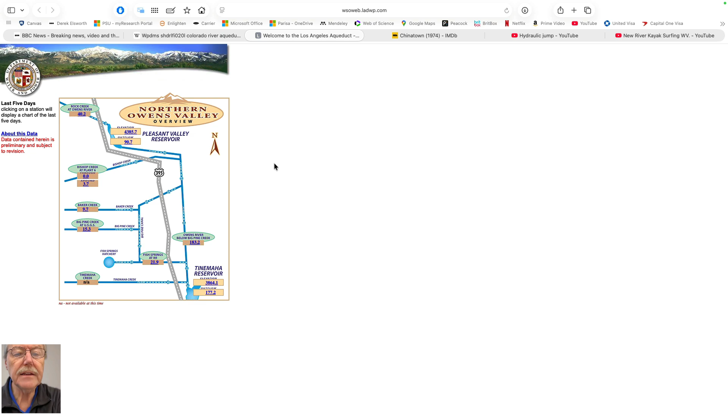I guess San Francisco probably gets its water from Yosemite, the Tuolumne and the Yosemite area of the Sierras. But certainly LA gets it from the Colorado River, and if you fly into San Francisco, you fly over portions of the aqueduct just before the coastal ranges.

The big controversy is where that water comes from and who has rights to it. Colorado wants it more now because they are dry and snowpacks are down. Actually, Chinatown, the movie with Jack Nicholson, before your time, talks about the settling of the Owens Valley, which is what brings the water into LA after it comes across the mountains. It's a story of intrigue set in LA.

So again, the things we talk about in this class in terms of open channel flows are perhaps less relevant, but we will talk about it today. Maybe tomorrow, on Friday, we'll talk about a big picture summary of where we've come and how it fits into your different disciplines, in large part.

We made the point last time when we were talking about surfing in West Virginia that the one thing that's different about open channel flows is that you have an extra degree of freedom: the water chooses to flow either deep and slowly or shallowly and fast. Understanding how that transition can occur is part of our job maybe today, but not part of our job on Monday, when we just talked about uniform flows, where the upstream level and downstream levels are the same.

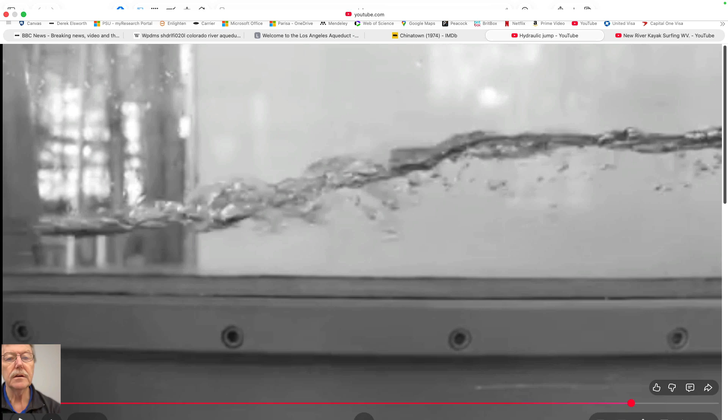It's actually kind of a fun topic, open channel flows, because you have the vagaries of this ability to flow in these two configurations.

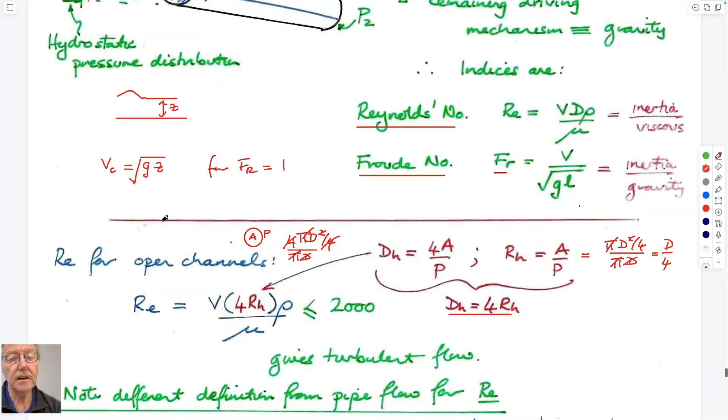Let's go back to what we started talking about last time, just to remind ourselves. The big picture was that pipe flows, external flows, and open channel flows follow the same kinds of rules. They all represent some kind of energy loss in the system by friction. In pipes, that's friction along the wall of the pipe, which varies from laminar to turbulent flow. On objects, such as a falling sphere or a free-fall parachutist, it's flow past that body which we're interested in, and we're interested in the force that's applied to it.

Essentially, if you're falling through space, it's the force of air pressure on your chest as you fall at 200 miles an hour at terminal velocity through the air, which is a pressure on your chest, a force that's applied to the sphere, either as drag or lift. That also follows from laminar behavior and turbulent behavior.

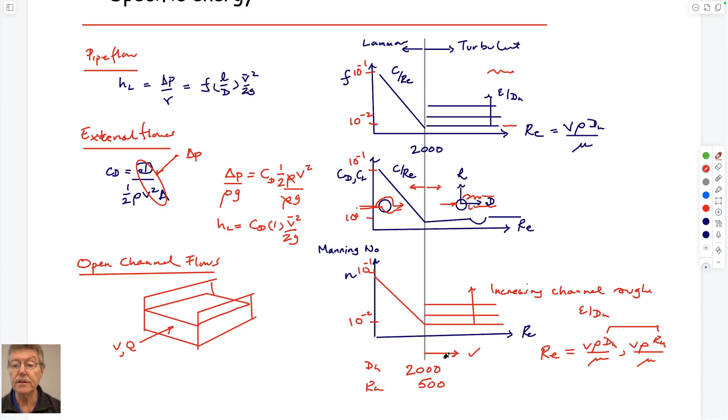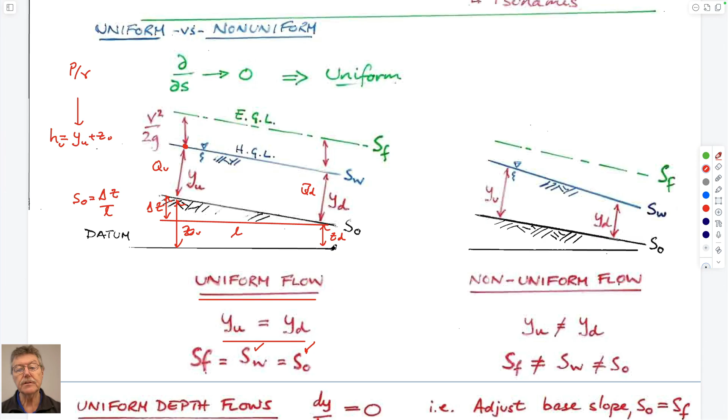When we talk about open channel flows, we made the point that these flows are so wide that the hydraulic radius is so large that Reynolds numbers are typically very large as well. So we only have to deal with the turbulent regime. That was the case we were making last time. We played around with some equations and came up with a formula, the Chezy formula, for the case where the upstream and downstream depths are exactly the same. That formula was this.

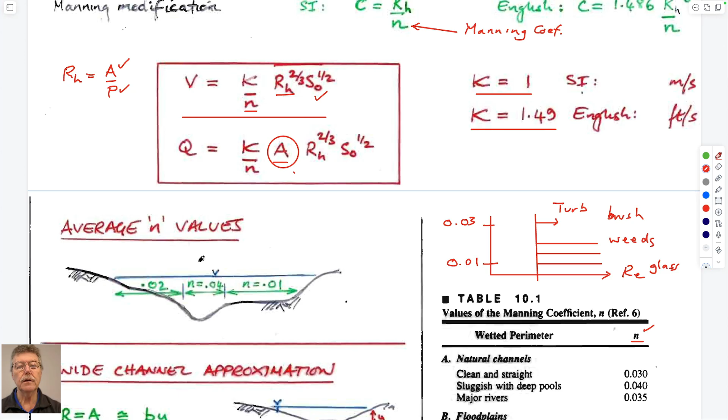This can always be used to calculate a velocity. If you multiply the average velocity within a channel by the cross-sectional area of that channel, it gives you a volumetric flow rate, which would be how water is supplied to San Francisco along the California aqueduct, if you knew these parameters.

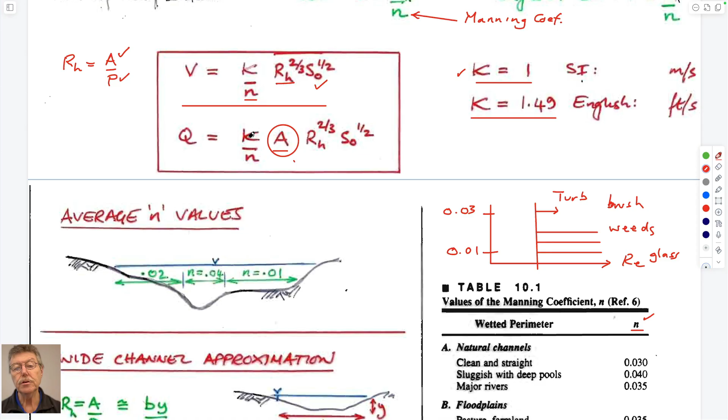We noted that they had dimensions. They were not non-dimensional - the dimensions on the left-hand side don't match up with those on the right-hand side, so we have to be careful of our units. If we're working in SI units, we have a coefficient of 1, and if you're in English units, it's 1.49. You can basically plug and chug with these as long as you know what these components are. We made the case that we're always working in the turbulent regime.

The Manning's coefficient is large if there's a big drag. So if you have brush within a channel, making a drag on the water at the edges, then that Manning's coefficient is large. And if it's a glass-lined channel or a smooth concrete-lined channel, then it's relatively small. So we can make those calculations.

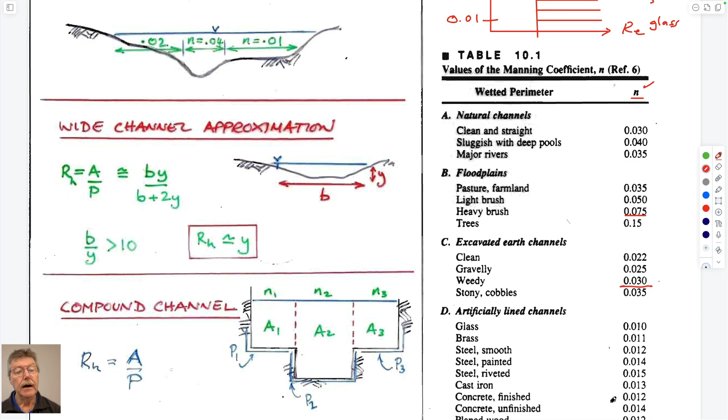These are just some notes on how you might apply it. If the channel is very wide and very shallow, the hydraulic radius is approximately equal to the depth of flow, just because in calculating the area and perimeter ratio, as it goes to infinite width, that will asymptote to just the depth. If we have channels with different materials on different portions, you can subdivide the channel to use different magnitudes of the Manning's number and sum those components.

So we talked about - if you remember back this far, just a drawing to remind you - we talked about pipe networks. If you're flowing between an upstream and a downstream tank with pipes, we said that the sum of the volumetric flow rates equals the total flow rate.

So that would be equally the case here. If you sum the flow rate in this section plus the flow rate into the page in this section plus the flow rate in this section, you have the cumulative amount, which makes sense.

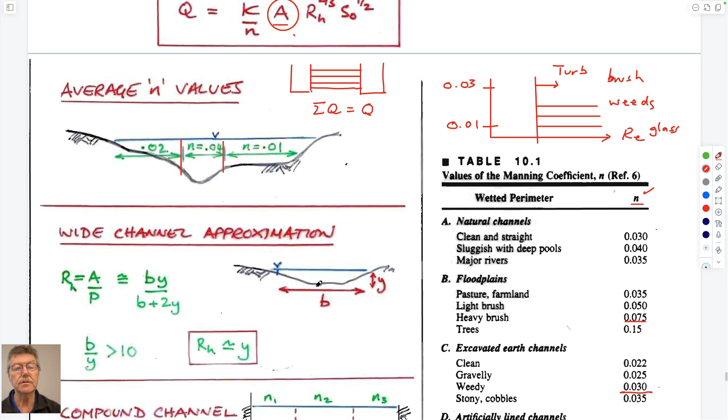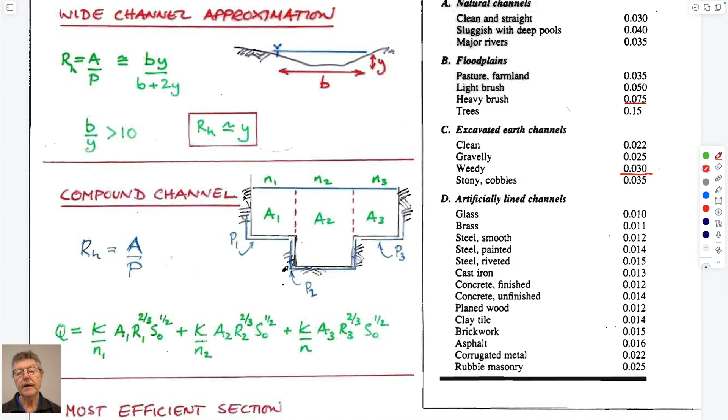If you have a compound channel, which is what this is, with different portions - even if they're the same Manning's numbers on the perimeters - when you sum them, you have to be careful in defining this hydraulic radius, which you need to use in Manning's equation.

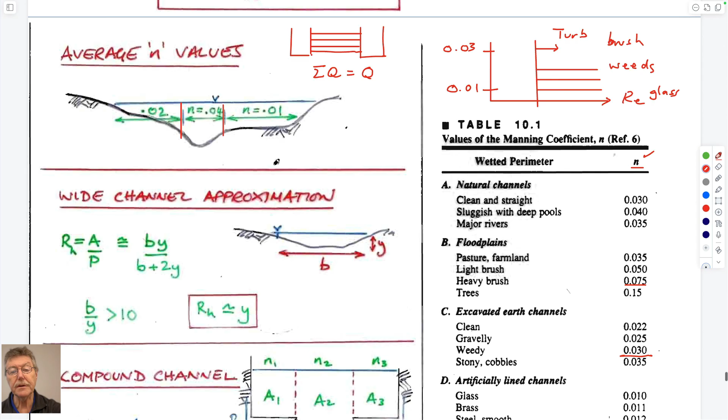I don't mean to give you whiplash. We need to use a hydraulic radius in these, and also the area for the volumetric flow rate. You need to be careful to rationalize the fact that the hydraulic radius is the incremental cross-sectional area divided by the perimeter. So for this channel here, the perimeter would be P1. It wouldn't include this as well.

The reason for that is that the water here is traveling at this velocity into the page. It's also traveling right next door at the same velocity, so there's no net drag between those two compartments. So the perimeter for this cell would be P1, and the area would be A1. So to get the flow rate, it would be A1 times the hydraulic radius, using just this perimeter P1.

Likewise, for this one, the perimeter would be this, and the area would be this. It wouldn't include these two other steps here, for the same reasons. And this is the slope of the basal bed, just as a gradient - drop in height over length.

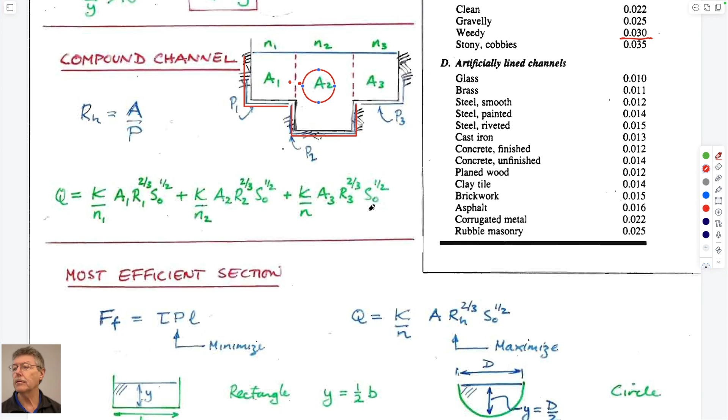So a big kayak river is 100 feet per mile - that's 100 feet in 5,000 feet, so that's about 2% for a very turbulent river, like the ones we looked at, perhaps. And that probably wouldn't be uniform flow. So these values of gradient are typically on the order of a percent or so, 1 in 100.

We can also figure out what the most efficient sections would be, where the drag on the exterior would be minimum for a given section. It turns out that if you look at a rectangular section, the most efficient section is where the depth equals half the width of the channel. For a triangle, it's a right-angled triangle.

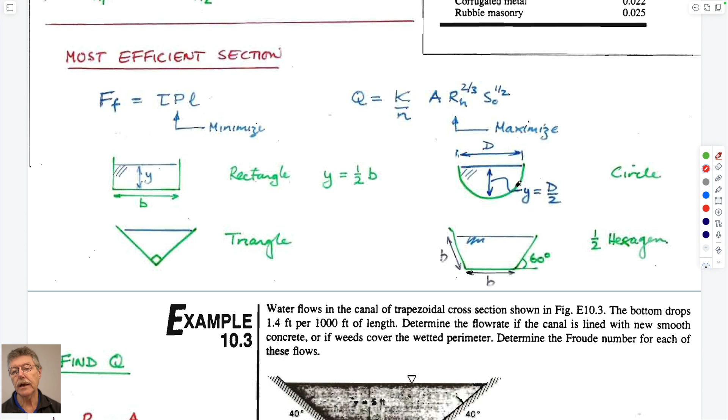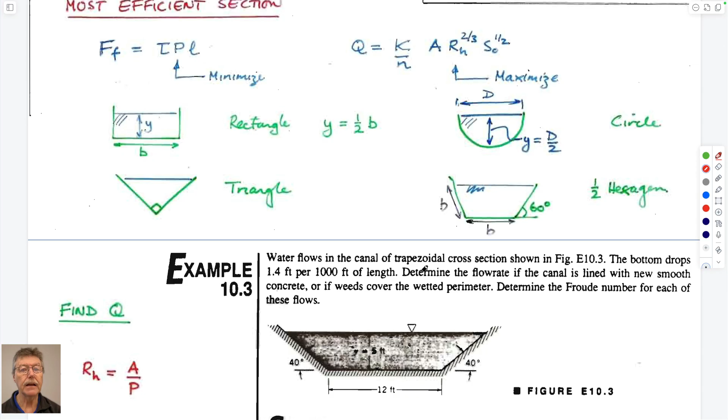For an arc-shaped channel, it's a full half circle that gives the best efficiency. And for a hexagonal channel, it'd be at 60-degree angles. So that's the Chezy formula. The midterm test, the final one, the flow question, this might be a good thing to look at.

Of what we'll talk about now, we'll talk about some other things which are more complex today, but the essence of the midterm final is related to uniform flows. So a quick example here is just to look at a channel which has a section given by this, just to show you what's going on.

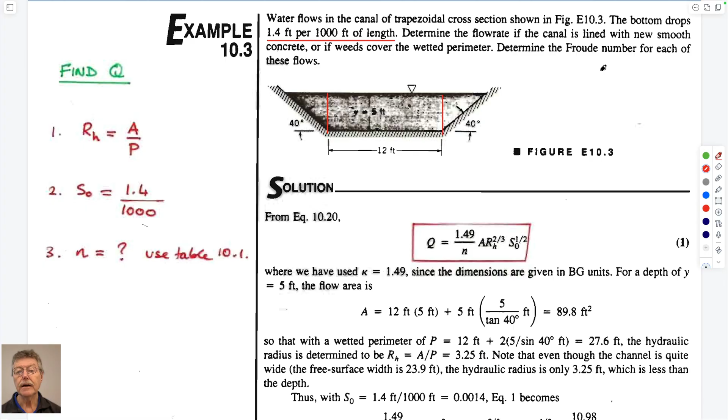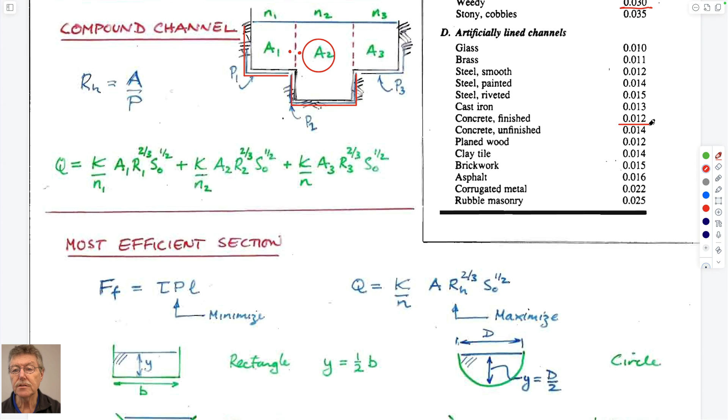It's trapezoidal. The gradient is 1.4 feet in 1,000 - that's the gradient of the bed. It's got smooth concrete - I think we just looked at concrete in terms of the Manning's coefficient. It's finished concrete, 0.012 or 0.014, so N would be this. I think it's 0.012 that they use - I didn't - 1, 2, or 0.0. You know that you're always given these numbers. And the flow rate, it's in English units, so it's 1.49 instead of 1.0.

Area, hydraulic radius, gradient - we have the gradient. We want to calculate the Manning's coefficient. So we have this, and we have to calculate the other two components. The area is 12 feet, it's 5 feet depth - perhaps you can't see that so well. This is 5 feet.

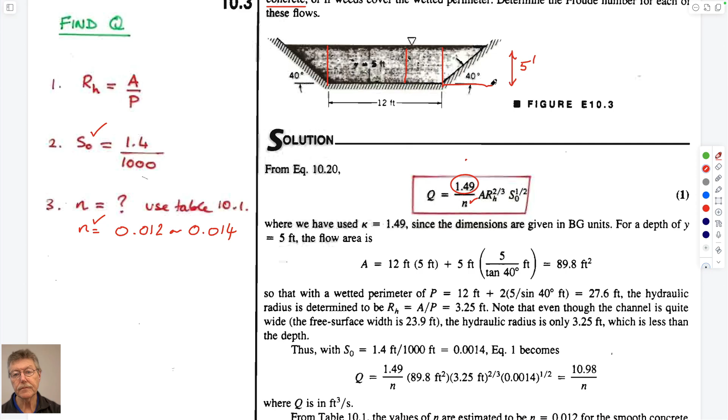So this would be 5, this would be L. L tan 40 equals 5, and X sine 40 equals 5. So you don't know this length, and you don't know this length either.

So you can get the area by taking the area of the prism, which is what this is, plus 5 times this length. This length here is equal to 5 over tan 40, which is this. So L equals 5 over tan 40, which is what this is. So this length times a half equals this area. So 2 times that is just equal to this prism because it's on both sides. So that's what this area is.

So this is... should I draw it properly? So this is this plus this. So you have the area, and you can all do that.

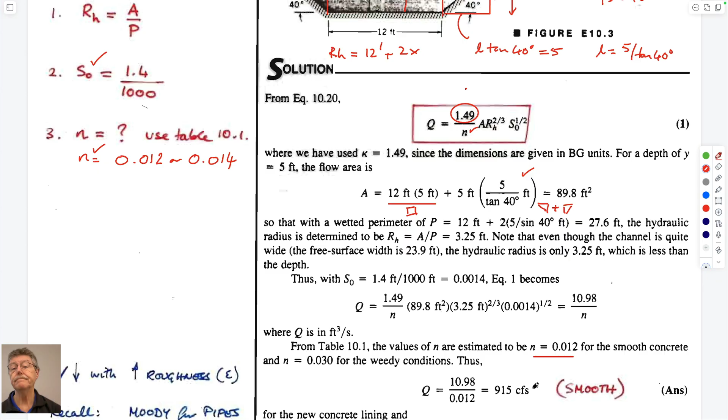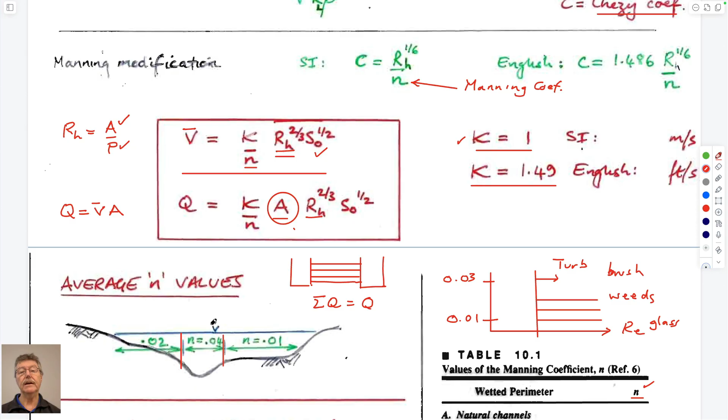That's it. So long as you know each of the components in this equation, the Manning equation, which is this, either this is the average velocity, or this is the product - volumetric flow is equal to the average velocity times the cross-sectional area. You know how to do that. So straightforward, just plug and chug. Very formulaic, okay?

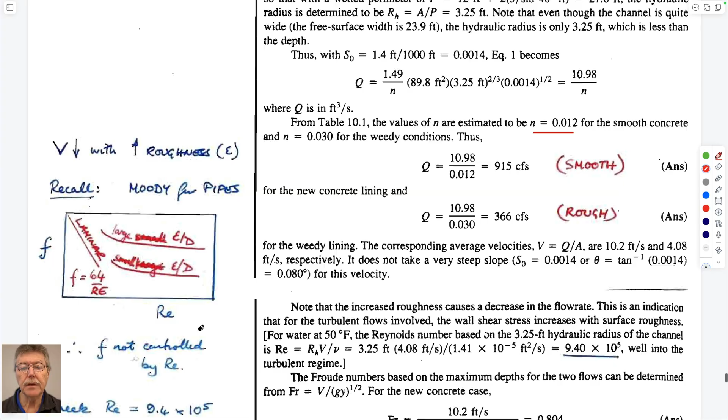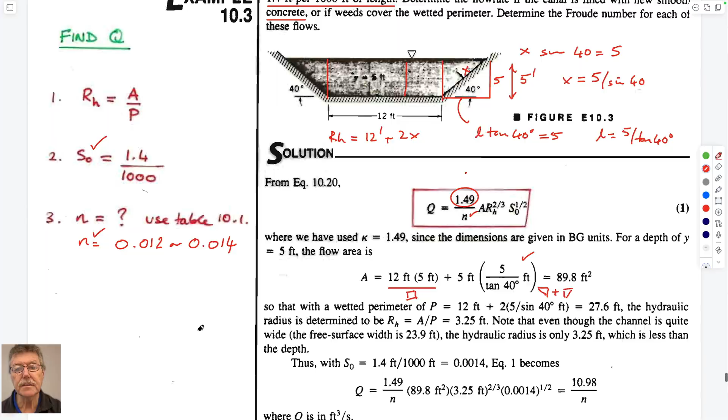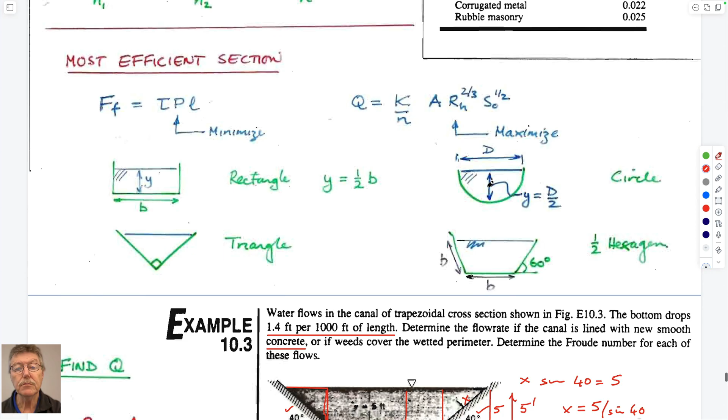All right, let's do something more exciting now. So a couple of examples there. And again, just to make the point - I guess we divided this up, kind of. We did subdivide this up into these. Actually, we used a total cross-sectional area. I guess in this case, since the Manning's coefficient was the same on all the surfaces, we didn't have to do this.

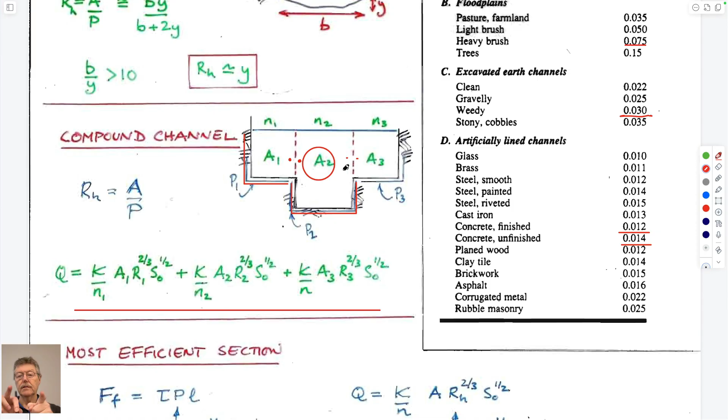And automatically, the perimeter included only the wetted perimeter, not the internal perimeters, which we leave out logically because they're both traveling at the same velocity, and so there is no friction by Manning's coefficient in those parts. Okay, all right, so that's that.

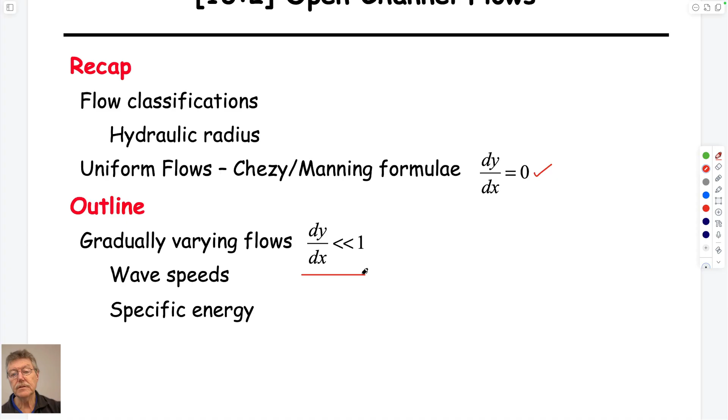So let's look at something more interesting. This is the case where upstream and downstream are exactly the same depths. If they're not the same depths, then we have to do something else to deal with that. And of course, this could merely be - I think the figure repeats itself. This is the case we started off with. Uniform flows are the ones we've talked about so far, that upstream and downstream are exactly the same depths, and they don't change as you go from upstream and downstream.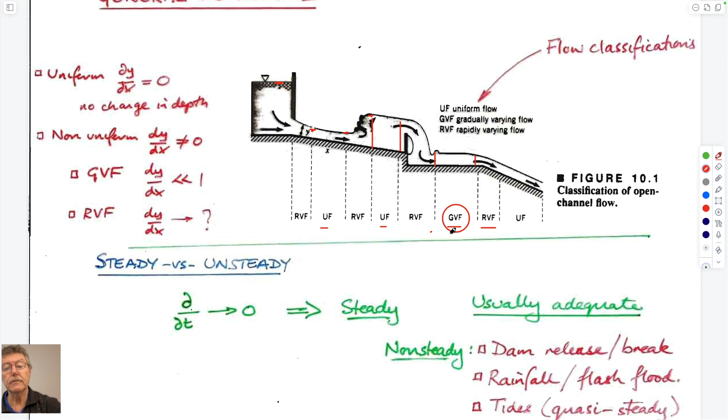Gradually varying flows are where it starts off maybe deeper upstream and maybe more shallow downstream. And we can use the analysis that we'll do for this to also say something about so-called rapidly varying flows, where it goes from something very deep upstream to very shallow downstream, or it could do the reverse, from very shallow upstream to very deep downstream. So the way we can look at those most conveniently is to just look at them under the rubric of gradually varying flows.

And we've seen this before. So the difference is that, as opposed to the case before, we had this elevation change delta Z over L. This is gravity, which is driving the flow.

If the upstream depths and the downstream depths are the same, the cross-sectional area is the same, and therefore the flow velocities are the same. So the hydraulic grade line and the energy grade line have to be parallel to each other, and they also have to be parallel to this slope. So all three of these gradients, SF, SW, and S0, are the same.

So SW is just exactly the same. This is this delta—I guess it should be delta Y. We can use it over L. So these are just gradients of these.

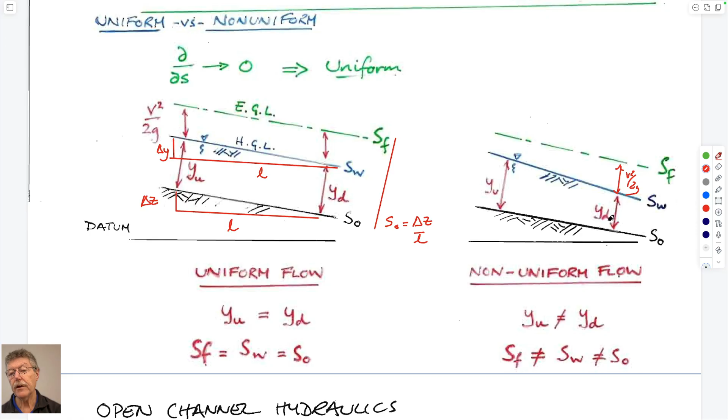If we look at gradually varying flows, there's no guarantee that if we go from upstream to downstream that the depths are the same, because they're not. So SW and S0 won't be parallel anymore. And I guess if we look at the velocity heads, then probably this velocity head is going to be larger because the cross-sectional area of flow is smaller. And so that's the rationale that we're working from.

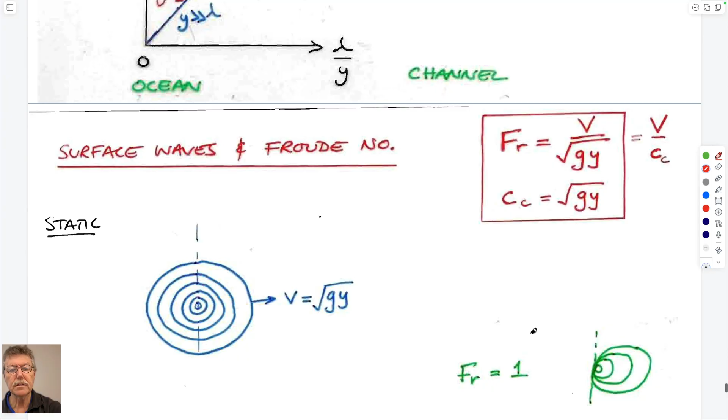So, okay, maybe I'll come back to—I don't do these derivations, and I want to come back to that. So I guess I'm going to write some stuff, see if I get it right today. So we're going to talk about gradually varying flows.

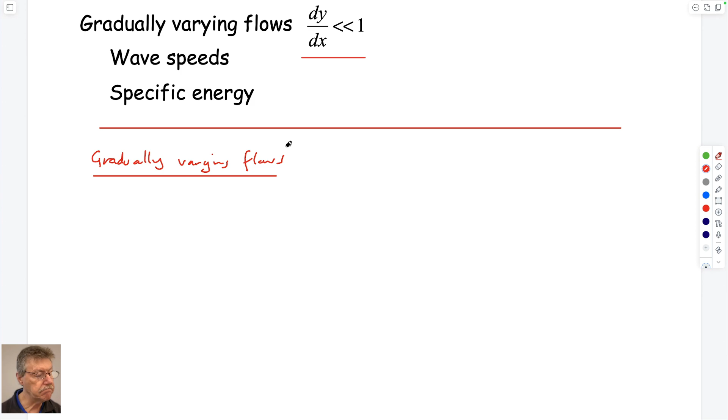So exactly the case that we have above, which is when this is the case. Okay, so what's the easiest way to introduce this? We can start off with z equals 0.

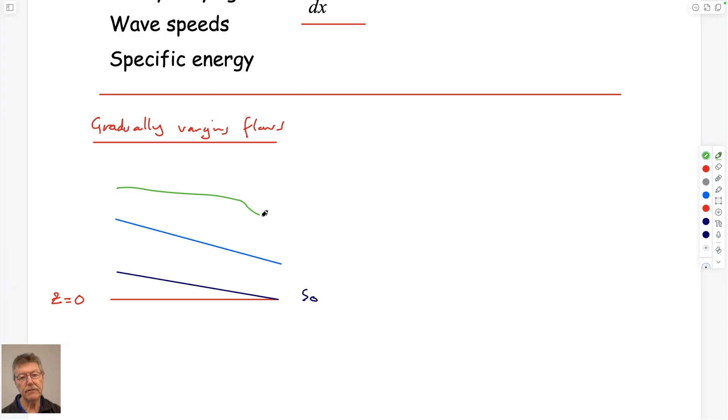We can have the bed of the river, which gives us S0, and we can have the water surface on top of that, which should converge from upstream to downstream. And it was green before, so let's do it green again. And that is to have this. So this is S sub F.

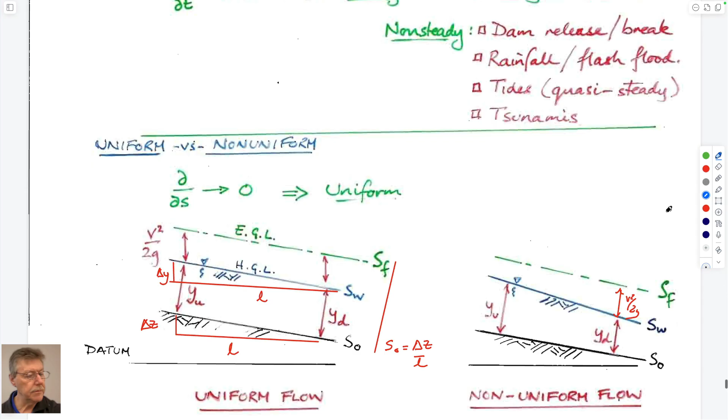What did we call this one before? Can't remember, need to remind myself. Didn't put it on there. SW, surface of the water, slope of the water.

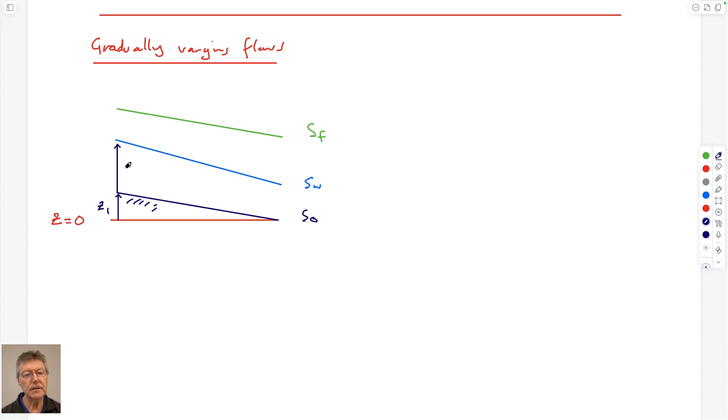And so if we look at these, and I just used black, then this is—you could think of this as Z1. I'm going to draw this vertical, even though it might be perpendicular to the bed. So this is the bed of the stream. So this is Y1. This is Y2.

And you remember for the Bernoulli equation, we write it between upstream and downstream. That's all we're doing. This is V1 squared over 2G. This is V2 squared over 2G. And this is flat. And let's call this H sub L.

So all of a sudden, maybe that looks a little bit familiar, in that if we write Bernoulli between upstream and downstream, we have Z1 plus P1 over gamma plus V1 squared over 2G plus HP equals the downstream terms. And this is the head loss.

So this is equal to L in this direction. And so we can simplify this. So first of all, we don't have a pump in here, so we can set this equal to get rid of this.

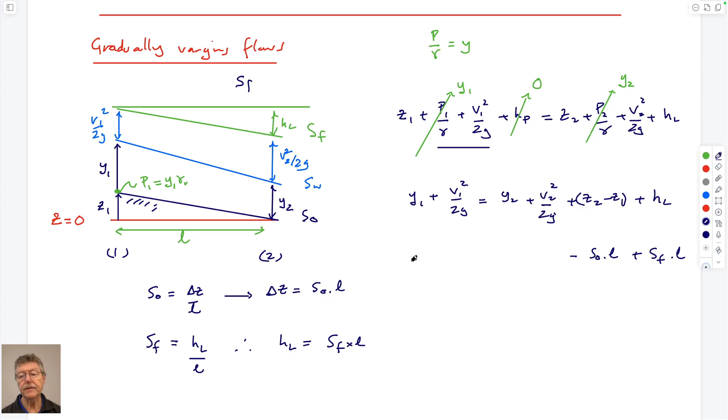Okay, that's the last manipulation. The rest fits in just as before. So we're going to make this substitution. The other thing that we would like to do, since the elevation may be changing downstream, is to draw kind of a perspective cross-section of this flow.

And this is flow into the page. So the components on this would be the width of the channel, which we'll call B, and the depth of the flow, which would be either upstream or downstream, which we'll call Y.

We'll have a volumetric flow rate going down here, which we'll call Q. I'd like to divide this up into a segment which is 1 unit wide, say 1 meter. Within this 1 meter, the volumetric flow per unit width we'll call lowercase q. This is just volumetric flow rate in the whole section, of depth y and width b.

The volumetric flow rate upstream and downstream is always going to be the same. But we'd like to characterize exactly what this Q value is as a flow rate per unit length. The easiest way to do that is to realize that the volumetric flow rate per unit width is equal to the total volumetric flow rate divided by B.

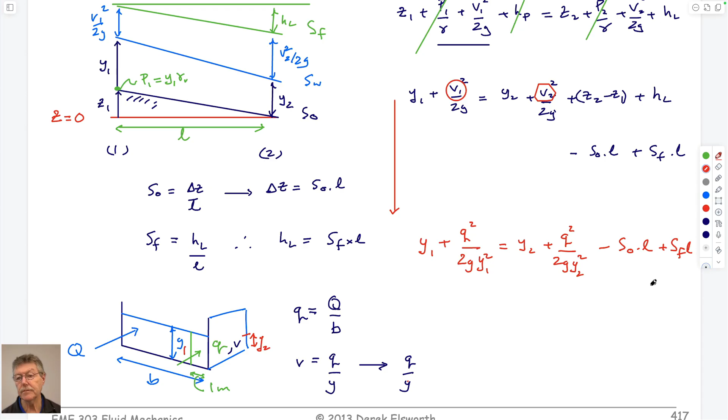And this is minus S0 times the length. So this is the gradient of the bed plus the gradient of the energy line times the length. And so we can write this in shorthand as specific energy E1, which is this.

Plus specific energy, sorry, not plus, equals the specific energy downstream plus minus S. I'm going to put these together. I'm just gathering these two terms and writing them backwards so I can have a positive here.

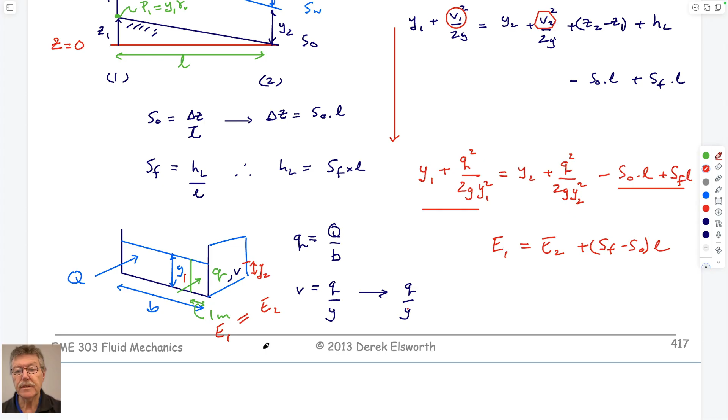So this is the specific energy that's present within the system. This allows us to say that upstream the energy is equal to E1, downstream the energy is equal to E2, and if there's nothing strange in the middle, if we ignore this gradient term, they should equal each other, and we can do a match between them. This basically says that as we go from upstream to downstream, the magnitudes of these should be the same.

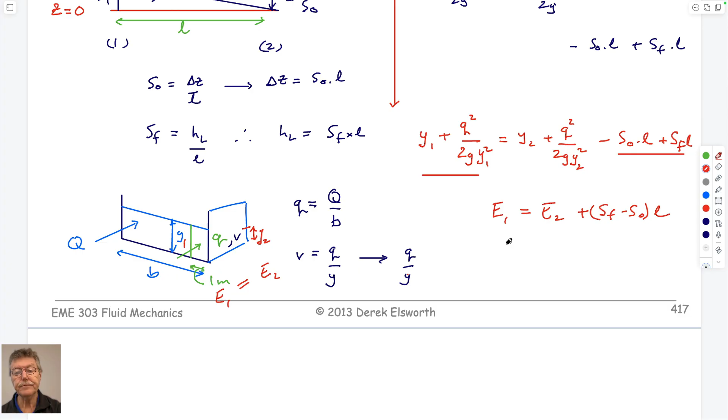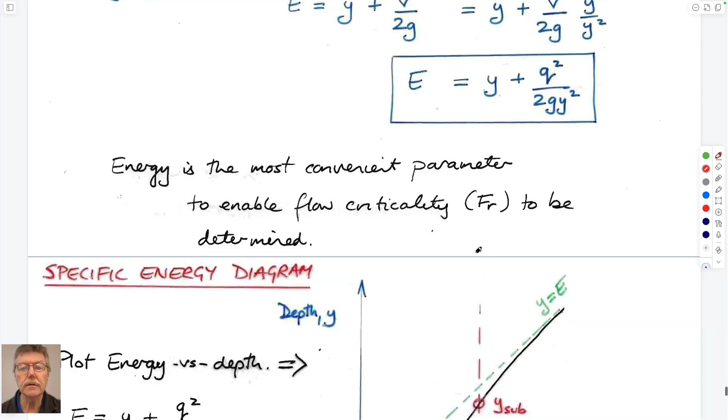Okay, so let's have a look at some of the pictures. I'll come back to that in a sec. Yes, Nicholas, I hear you talking. Yep, hit me. Okay, you want me to use it?

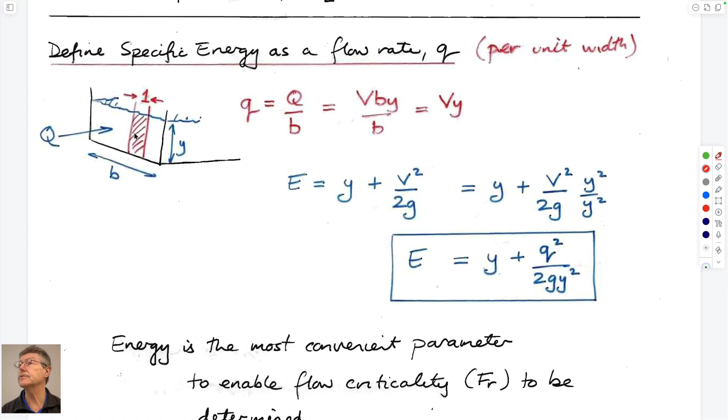So would lowercase q in this case represent the flow over a unit area, whereas uppercase Q is the flow over the total cross section? Lowercase q is the flow over 1 meter or 1 foot width, which will be the same per 1 meter width upstream or downstream, but the velocity of that will be larger downstream if it's shallower, and smaller otherwise. The velocities will be different upstream and downstream. That's what we're doing. So we're defining this, and we need to keep these things present.

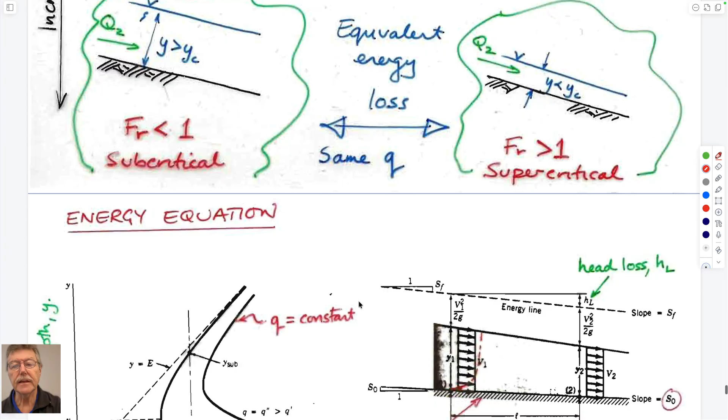So what we could do, I guess that's what I was checking on because I couldn't quite remember. We're okay so far, we have the right expressions.

So as we're going upstream to downstream, if we drew this along the length, as the most dramatic version of this, we could have a weir. This wouldn't really be a gradually varying flow, but you get the picture that this could be y1, this could be y2. This is probably a rapidly varying flow rather than gradually varying flow, but this is the idea that it can change from upstream to downstream.

So this energy we can equate between upstream and downstream. So what we could also do is rewrite it as upstream or downstream, and it's equal to y1 plus q squared over 2g y squared. I don't want this, this can be any depth.

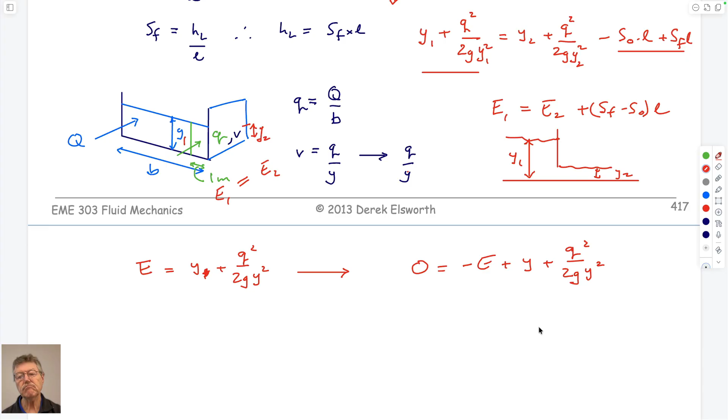And so we could rewrite that as a quadratic that is equal to 0, equal to minus e plus y plus q squared over 2g y squared. And I suppose to make life easy, we could multiply both sides by... what do we want to do? Y, yeah okay, is equal to e y squared plus y cubed.

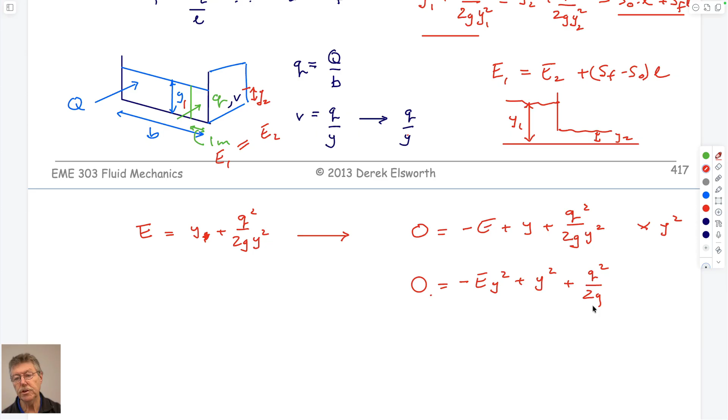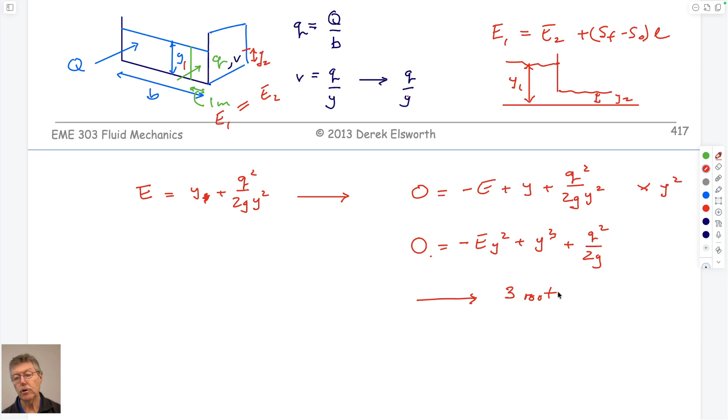So if we multiply this by y squared, top rather, then it is equal to q squared over 2g. This is cubed, right? And so this is a cubic equation. All we've done is multiply it by y squared. So we have a power to the 0, a power to y squared, and to y cubed. And so this has 3 roots. Quadratic has 2 roots, linear has 1 root, and cubic has 3 roots. There are 3 solutions for y.

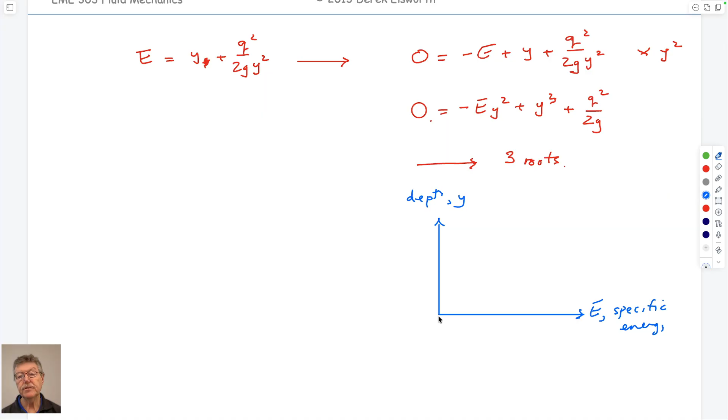So what we could do is plot the 2 terms that turn up in this. We could plot energy - this is specific energy, we haven't defined it yet. And we could plot depth of flow, which we'll call y. And we presume that if it's really shallow flow, the depth would be 0. So what we could do is choose y bigger than 0 and less than infinity.

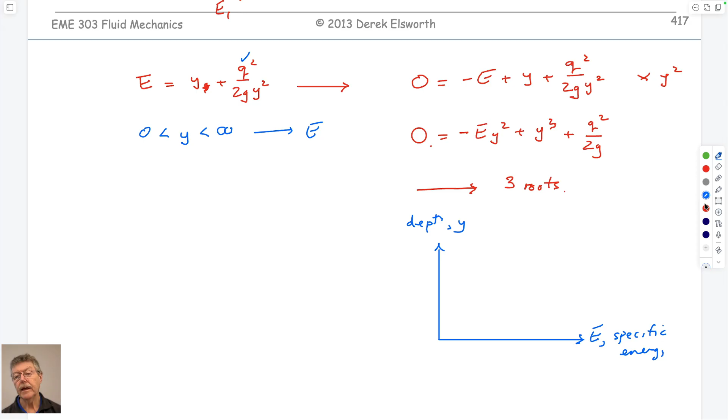And we could use that to calculate E. So here we have E as a function of y, Q as a constant. The flow coming down our channel is constant, gravity is constant on this planet. If we change y, then we get a value of E. And if we plot that, it would look something like a nose, basically. It would asymptote at the bottom to flat, and it would have another portion here.

And so if you look in your flow, that energy is constant. So E equals constant. This would be the equation, these black lines would be the equation for Q equals, I don't know, 5 meters squared per second, right?

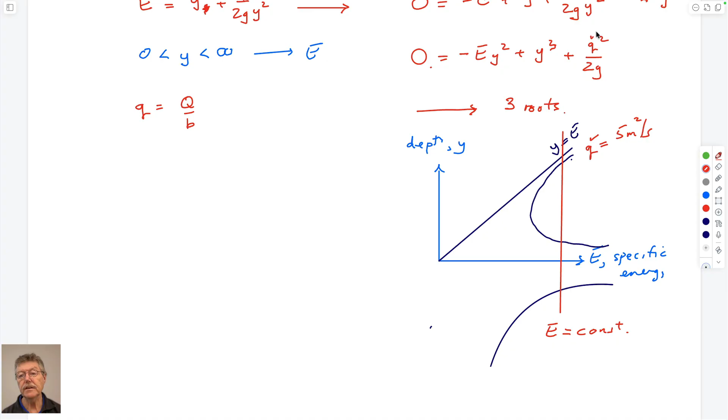So what's Q? Q is equal to the volumetric flow rate divided by the width. So this would be Q, cubic meters per second, divided by meters. This would be meters squared per second. So in your channel of a given width, we can always calculate what this is. If we know what this is, we can always calculate this.

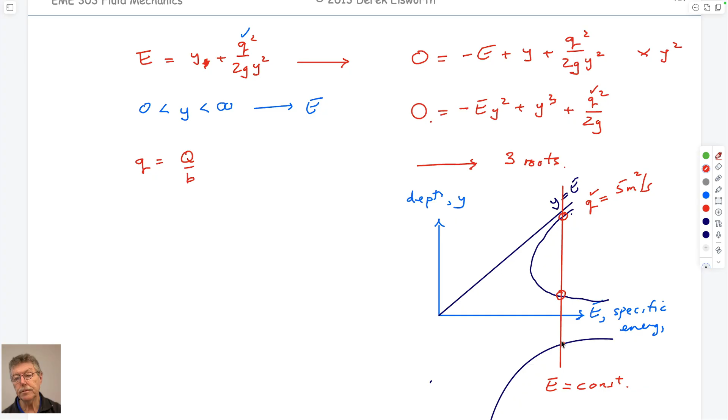And these are the 3 roots. So these are the 3 plausible solutions to this equation. It could be this depth, it could be this depth, or it could be negative depth. Can't be negative depth, doesn't make sense. So these are the 2 roots that are viable. And the cool thing about this is that this represents our flow system.

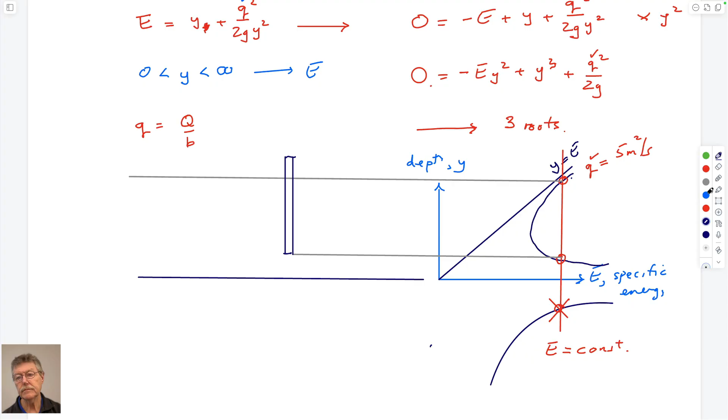Are you wondering what this looks like? This is our system. Upstream, Y1. Downstream, Y2. It was for gradually varying flows, I guess we said, but we're co-opting it for this. And so these individual depths are given by these potential solutions to that problem.

It's kind of cool, this means that it can travel at this, it can be present at this velocity. This would be Q, and this would be Q - these would be the same. This would also be lowercase q, and this would also be lowercase q. But this would be V1, and this would be V2. And V1, in this case, is much less than V2. They're not the same, these are the same. So Q1 and uppercase Q, lowercase q1, and uppercase Q2 and lowercase q2 are the same, but these aren't. And they would be this.

I just chose a number, we didn't do an example. So that's physically what it represents.

And so the other part of this, I think that's fascinating, is that this is orderly, and this nose here, the part that is furthest forward, we will call the critical depth, y sub c - this is not gc, it's yc. And this would be the minimum energy, E min, that this is moving at. So this particular nose has these properties.

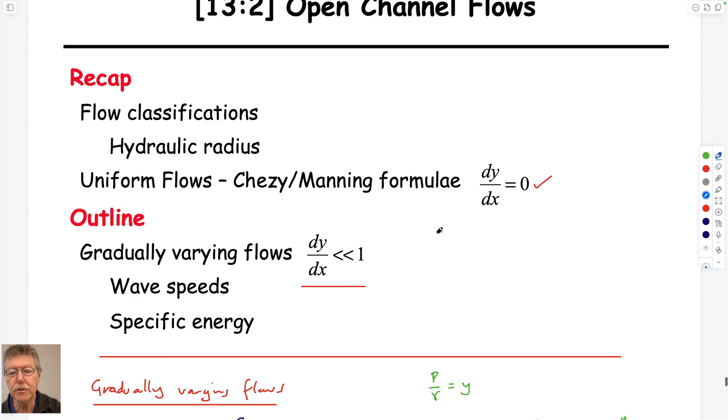And so this critical depth here would be the transition between the two. The other cool part of this relates to the drawings that I have that perhaps try and explain this.

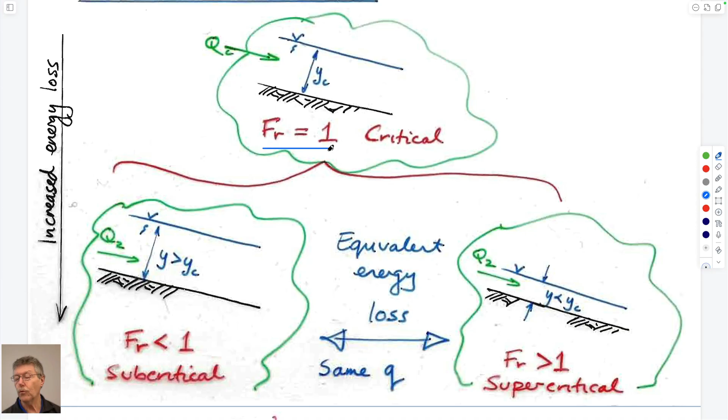So this is the idea. This is kind of our upstream behavior here. It's deep, it's flowing relatively slowly, and this is greater than the critical depth, which is y sub c, the point that's on the nose of our diagram. If it's flowing critically, the Froude number is equal to 1, which we'll revisit in a second to see what that means. And so we can define a depth - the depth we define is exactly the depth of this nose here.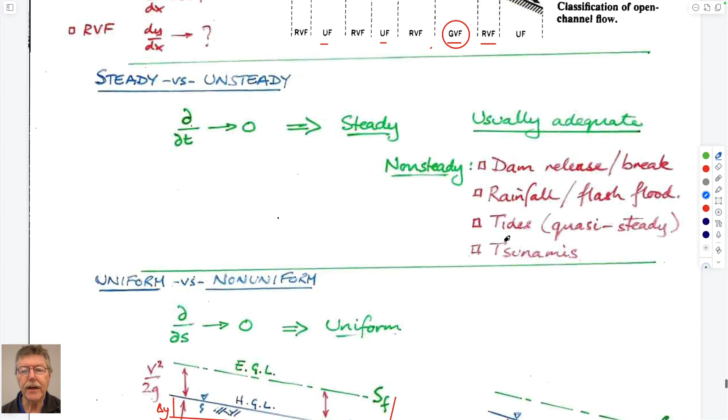The point is that at this particular flow velocity in a system, it could flow either slowly and very deep, or very quickly and shallow, and we don't really know how to choose between them because they can both happen. So it matters which side of this critical point we are, and that relates to some other parameters in our system. This is the figure that explains that.

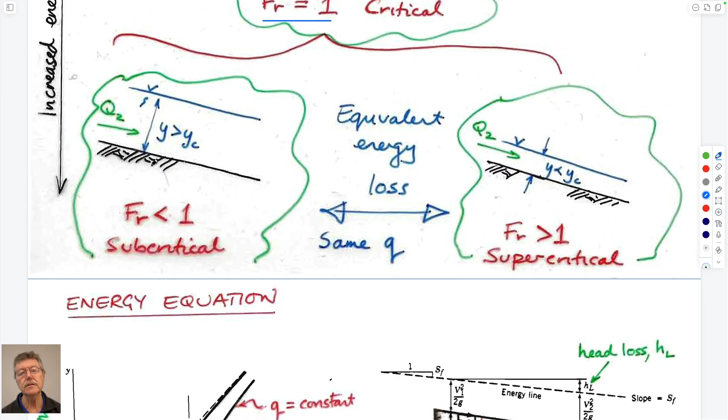It could be reversed as well - a hydraulic jump, fast flow upstream, all of a sudden jumping to deep flow, slow flow downstream. It's just the opposite of this. But it's the same idea that in going from subcritical to supercritical, or the other way around, we have to go through this critical depth.

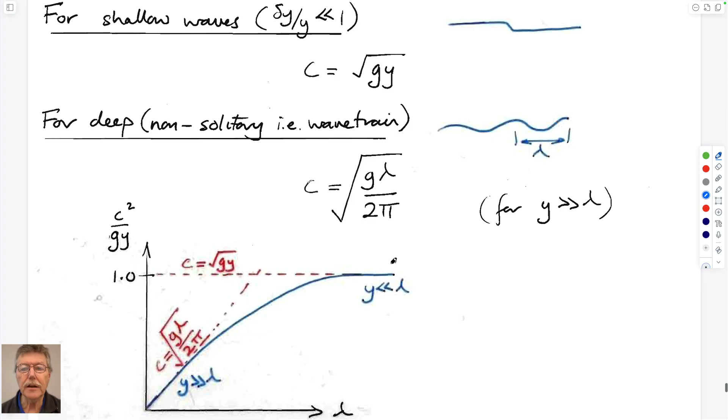So how do we define that? Well, it's defined in terms of the Froude number. And the other cool thing is that this would be subcritical. So we've defined this Froude number - it's equal to the flow velocity divided by the velocity of the celerity wave.

The celerity wave is the velocity of - if you drop a stone in a pond, the velocity of the ripples that come out of that is the same as a tsunami. And Vs, we know, is equal to the depth of flow, which we'll call y, multiplied by gravity, square root. So this is the same depth that we're talking about here.

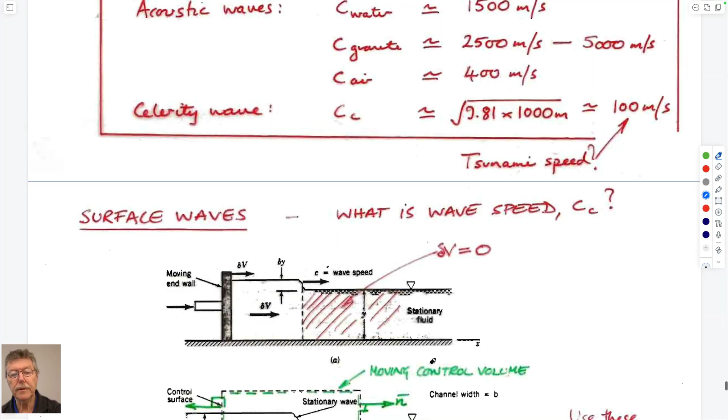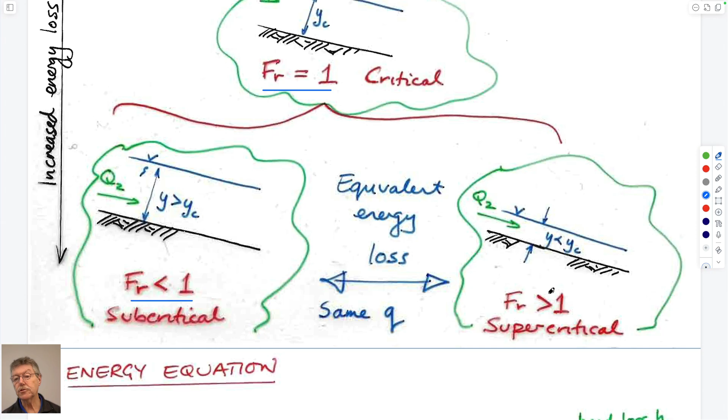And the kind of cool thing about this is that the Froude number changes from the numbers we talked about here - should make sure I get it right. The Froude number at this nose is equal to 1. So the ratio of the velocity of the surface in the subcritical flow is less than 1. This is for the deep flows. So this is subcritical above the nose, and it's supercritical for the shallow flow below the nose. So I guess we can write this.

So in other words, this point here, Froude number is equal to 1. Above it, Froude number is less than 1. And below this point - I know it's getting to be a complicated diagram, and by the way this is not on the test, but it's cool stuff. The numbers on this curve, if you calculated what the velocity was relative to the depth of flows which occur in this, then the Froude number would change from 1 to being 0.9, 0.8, 0.7, 0.6, 0.5, and it would go from 1 to 1.1, 2, 3, 4, 5, 6, 7. So this...

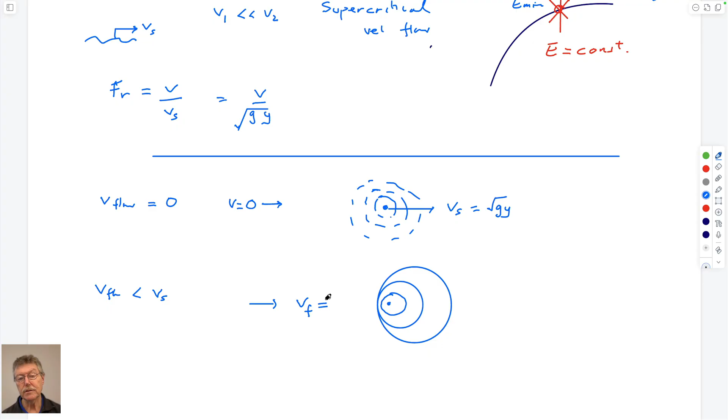The reason is that this is going downstream at some flow velocity, v flow, not equal to 0, and therefore it'll look like this. If you throw the pebble in when the flow velocity equals the wave speed, it will look like this—imagine that's a circle.

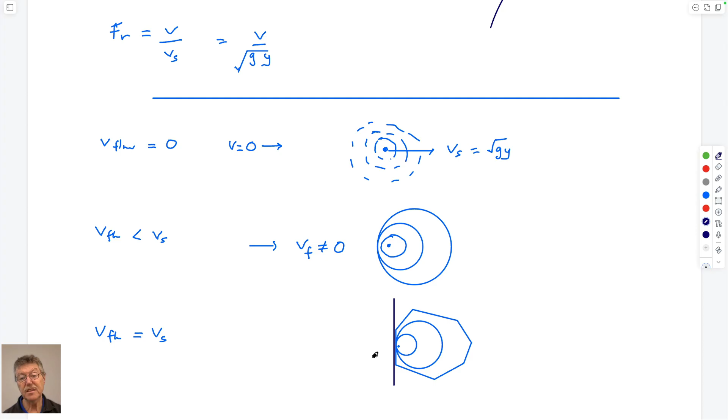The main point here is that at the point where the pebble is dropped in, there's zero information going upstream. So there's no communication between what's happening downstream and upstream. This is for a Froude number equal to V flow over V celerity wave—we said they're equal, so this is equal to 1.

This is the same as screaming into the wind that's traveling at the speed of sound—if it's traveling at the speed of sound, no one upstream will hear you. You'll get blown away, of course, but no one will hear you. That's exactly the equivalent of this: something's trying to move upstream, but the airflow is going downstream just as quickly, Vs and V flow exactly the same in opposite directions.

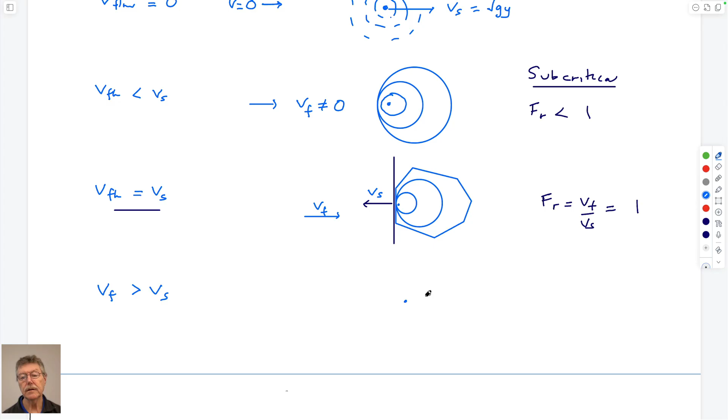Now consider the case where V flow is much greater than Vs. What does that look like? First one is here, second one is here, third one is here—thinking about these ripples radiating outwards, the fourth one looks like this. Pretty cool. This would be Fr greater than 1, and this is supercritical.

So now the information that is downstream has no chance of being transmitted upstream, and that relates to these behaviors. The Froude number is the way of defining these regimes—it's an important number in free surface flows.

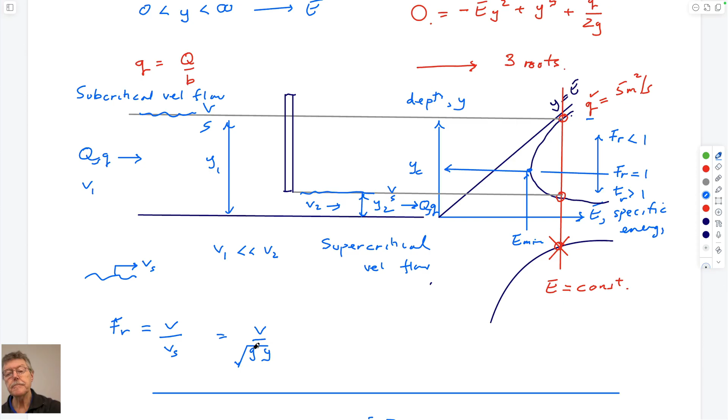When you make a bow wave at the front of a ship, you lift up the water, acting against gravity, so you expend effort pushing the ship. The ratio relates to getting that water away from the nose of the ship by radiating outwards—if the ship goes very quickly, the bow wave builds up high and you need a lot of effort to get past it. In supersonic flight, the wave velocity involved isn't a water wave on a free surface, but the acoustic wave by which you hear me, and it can't get away from the nose of the plane. So you have to build planes for supersonic flight much stronger, because the energy can't radiate acoustically away from the aircraft.

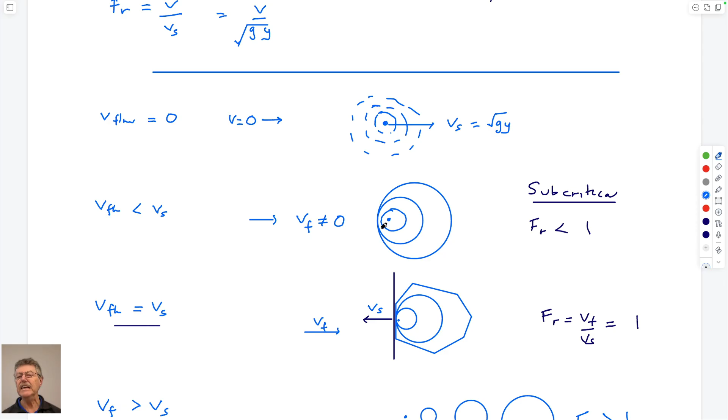So esoteric stuff, not on the test, but fascinating, I think. Don't you think? That was just... I saw there was no passion in that head nod, but that's fine.